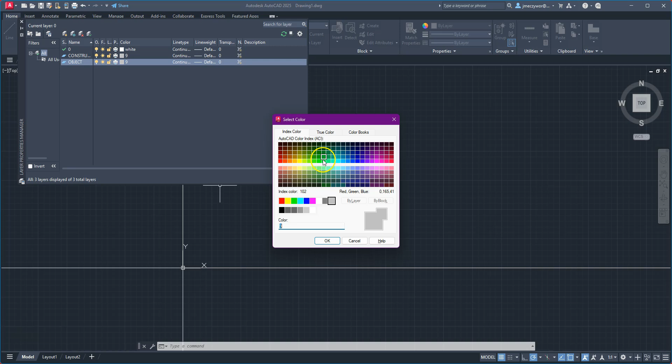Then we're going to right click and hit new layer again, and we're going to call this an object layer. That's where we're going to create our solid lines. We'll double click on our colors again, and my school has green as one of their colors, so you can pick whatever color you like. It doesn't really matter, you can pick red or purple or whatever, but I'm going to pick a nice green here and hit OK. That sets my two layers. That's all the layers we're going to need for this exercise, but normally you might make a hidden layer or a phantom layer, etc.

For my students, my co-teacher and I have actually created templates that have default layers identified for specific things, whether it's plumbing or HVAC, or whether it's a mechanical drawing where we have things like an object line, a phantom line, or cutting plane line, etc. So I'm going to X out of this now by hitting this little X up here.

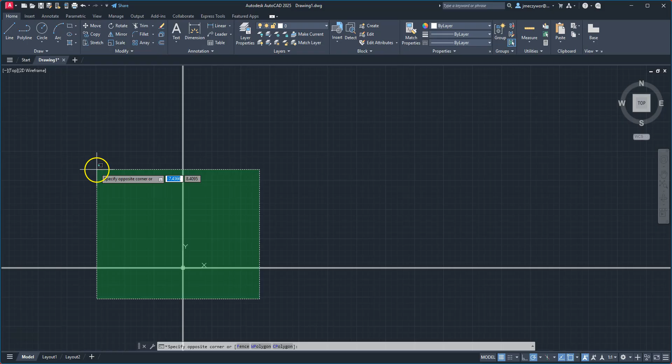Right now, these are on my 0 layer. So what we can do is click below and to the right here, go up and to the left to make a little green box to overlap everything, and click so they highlight. Up here, I'm going to click this down arrow and go to construction. You can see my lines actually switch to a construction layer. If I hovered over that, they would go green, but we're going to go construction because that's what they are, construction lines. Now I can hit escape, and these are on the right layer. Before I forget, I've got to make sure to switch to that construction layer for any lines I'm creating.

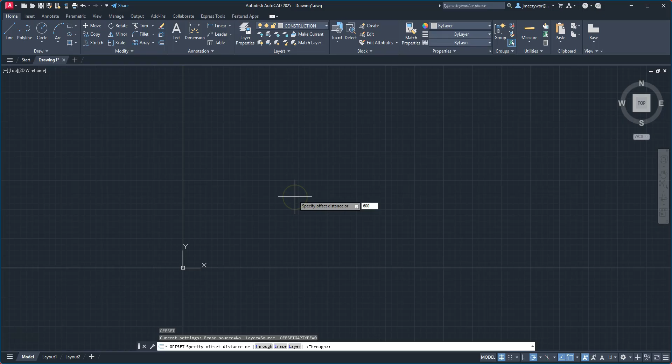Now we're going to offset by typing O and hitting enter. The width of my logo is 600 millimeters, so I'm going to type 600 and hit enter. I'm going to click this line, the vertical one, move to the right, and click. It's okay that I can't see that line right now.

Now, I could hit escape and type offset again, but what I recommend is hitting spacebar. That'll exit you from the command. Hit spacebar again and it brings you back in. Now we're going to go to 420 for the height of the logo and hit enter. I'm going to pick this horizontal line, move up, and click.

Now if we zoom out until hopefully we can see everything -- I'll hit escape first -- but if we zoom out now, we should be able to find that box. This is the overall shape of our logo.

Now my logo has a number of different dimensions, and what I'm going to have you do is create a whole bunch of lines. It's not really going to look like anything yet, but I know where we're going, so just stay with me and eventually we'll end up where we need to be. The next thing we're going to do is this shape, which is an M -- kind of a block letter style. So we're going to create some of these different lines we'll need along the way.

First I need a line in the center because that's where the center of the M goes. So O, enter, 300, enter. We're going to go from here to the center and click. Then from there, I need to create some points for where the M actually comes down at an angle. So we're going to go back into that by hitting spacebar, spacebar.

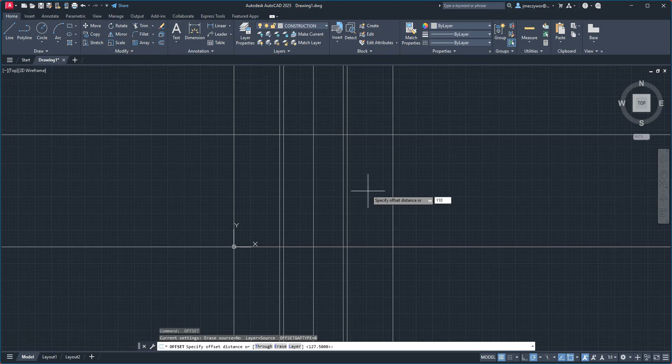Now I'm going to hit spacebar again, and we're going to make sort of the outside edges of my M. The number we're going to need now is 110. So 110, hit enter, pick the top line, go down 110, pick the bottom line, go up 110.

Now I'll give you a little sneak peek of what we're making so you can maybe start to piece this together. But this is the shape that we're making here.

Going back over here, I'm going to hit spacebar again, and we're going to go 45. This time we're going to go from here, in, and from here, in. But I also need to go in from those other edges as well. We had our 255, which would be a little bit further out. I'm going to take that and go to the left.

Now it's going to get real confusing. I'm going to take this line here, go to the right, and put that in there. All right, I have almost my whole shape here.

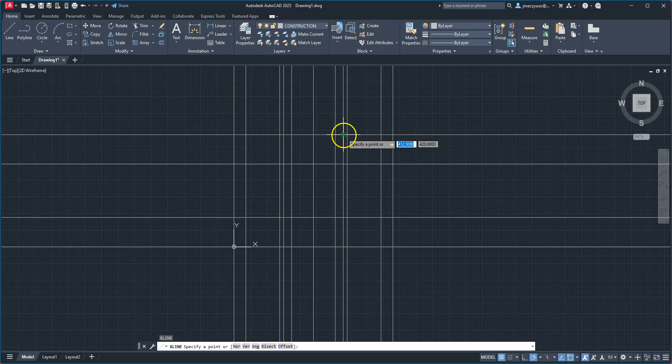Now the last thing we need to do is hit escape, type in XL again for X line. I gotta be careful here to make sure I don't send you to the wrong spot. We're gonna pick on this point right here, and what we're going to do is put an angled line in. Now to put the line at an angle, I got to do a little bit of math here in my head, to be honest. But our number is going to be an angle of...

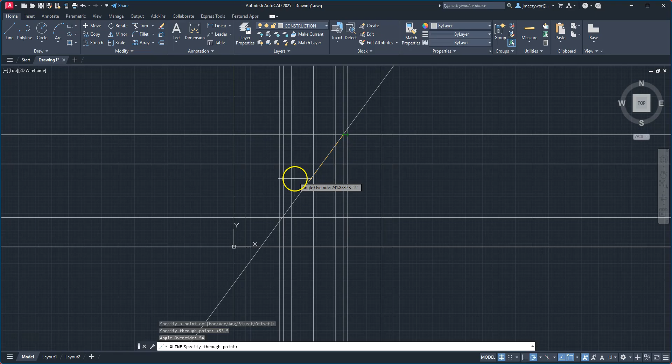53.5. All right, so the way I type that in is I'm going to hold shift, hit the comma key, which is going to put this little Pac-Man guy in - that's what I like to call him. I know it's the less than sign, but it's more fun to call it Pac-Man. And we're going to type 53.5, and we're going to see if I was right, Lizzie. That's going to lock it in at this angle right here. Then all it wants is for me to pick a point somewhere at that angle to lock it in. So I'm going to click, and it's in there.

And then I'm going to hit the space bar again, and I'm going to find that point on the opposite side right here. And then I'm going to click like this. And I'm going to come right down to where that thing meets, and click again. And I don't have to do any math. All right, and I'm going to hit escape.

Now, here's the fun part. Now it is just connect the dots, or connect the intersections, I guess, technically. So we're going to go up to layer properties, hit this little down arrow, go to object. Hopefully that, you know, whatever color you picked is different than gray.

So we'll now type L for line, hit enter. And you're going to have to follow along with me - I promise we'll get there. If we make a mistake, it's all good. In a lot of my videos, if you've watched them before, if I make a mistake, a lot of times I don't re-record the video because it's a good opportunity to sort of show you how to get out of it. Hopefully we don't have that scenario here.

Ooh, actually, before I even say that, I realize I made another mistake. All right, so let's hit escape for a second. Okay, we need to offset these angled lines to make our M properly. So we're going to go O, enter, we're going to use that 110 number again and hit enter. We're going to offset this one down this way, and offset this one down this way. And you'll see why in a moment.

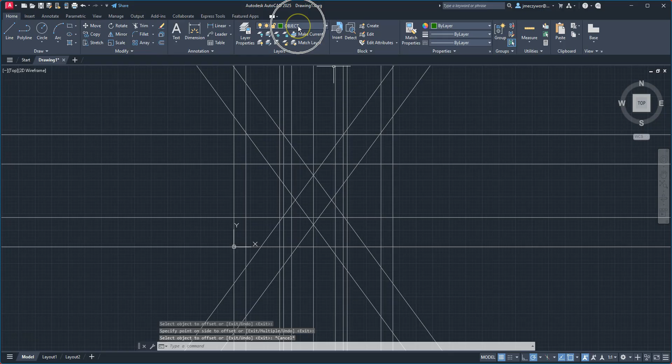Now we'll hit escape. Now we'll make sure that we're on object. And now we'll type L and hit enter. Here we go. Let's see if we can make a nice M. So we're going to click here, go up, click, over, click, up, click, over here. You can follow along with me.

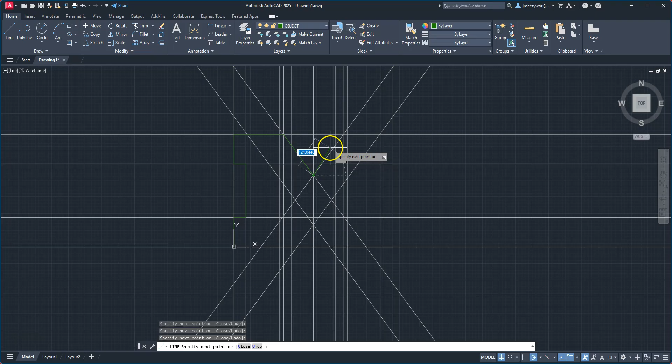Sorry, I won't narrate the whole thing. All right, we're going to go here, and over to where that line was created. Click, down, up, over. We're getting there, folks. This is looking good so far.

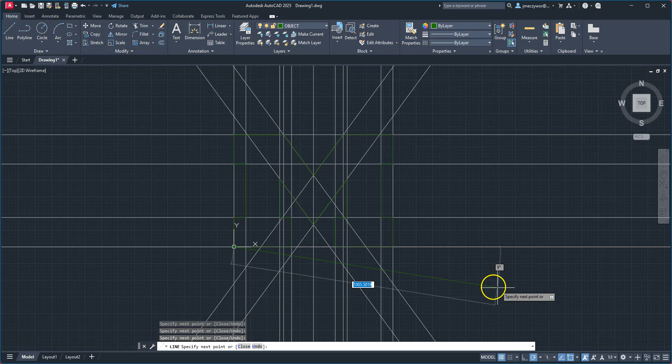Line over, I'm gonna confuse myself here. Click. Over, down, over again, and then we're gonna hit escape. And somewhere in there, there's an M. All right, but what we do now is we're gonna hit the down arrow. Let's see, moment of truth.

We're gonna go to our construction layer, we're gonna turn the layer off. If we did this right, we're gonna have an M underneath. Let's see what happens. Look at that - we've got an M. Okay, so now that we have this, we don't need that construction layer anymore. And I'm going to show you one more trick.

Okay, because with this shape, what we've done with our logos, we made a little border and then we put other things on there as well. But I'm going to show you the way I would do it. And this will be a good opportunity to not only show you the offset command again, but also show you how to trim things and extend them in order to create things.

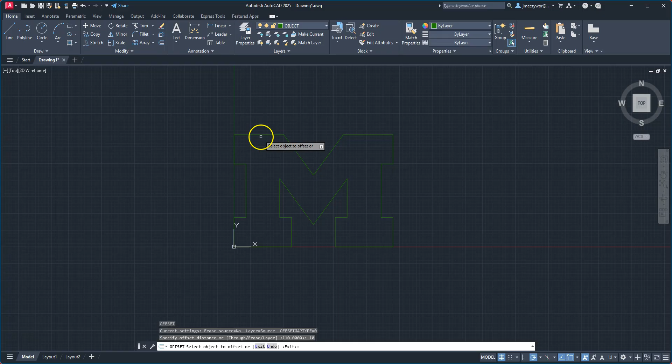So we're going to go O, enter. Our number is going to be 10. We're going to make a little border, make this thing sort of a 3D thing. All right, hit enter. Now I want you to take this line, offset it down, offset this in, so on. We're basically just going to create edges for the inside of our M.

You can see all I'm doing is offsetting every one of these lines in. Some of them will overlap, some will be short. It's all good, that's the point of this exercise.

Now while we're doing this, let me explain this construction layer thing that we were doing along with our object layers. You could see that it was a little confusing before. I obviously knew what we were doing because it's my project, but if you were creating a drawing on your own, you need to find what works for you.

I know some people I've worked with, when they're making views and edges and things like that, they'll only make a certain area for the construction, then delete those construction lines, then make the other more detailed stuff after, feature by feature. But the more you use this, the more you can see through stuff that initially looks like this to what you're actually trying to create.

Once you've offset all these lines like I have, go ahead and hit escape, and then type TR for trim. Now what we're going to do in some of these types of corners is pretty obvious. We're just going to pick these edges and get rid of them.

Click, click, okay. You can also, if you click away from an object, click and drag, and it'll make this sort of squiggly line where you could trim things at once. Like over here, I can do the same sort of thing.

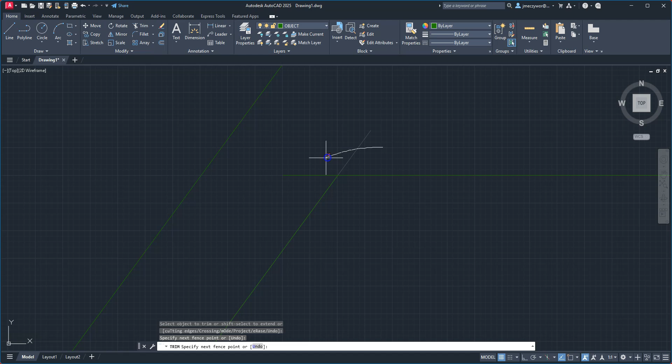Get rid of it. So first thing we'll do is trim. We'll kind of get rid of the loose ends, so to speak. Let's go around, do all our trimming. It won't be the last we have to do of it, but we'll get most of it done.

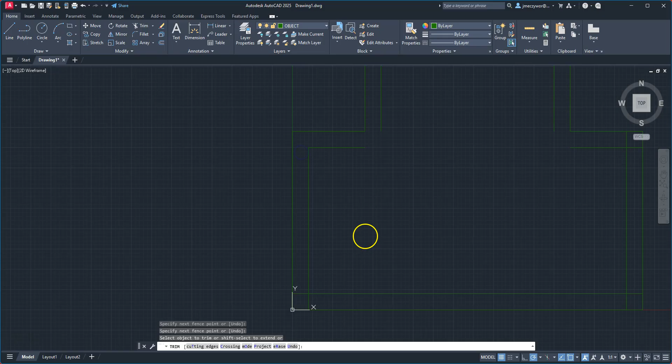I can middle click and hold it down. I can pan like this if I want, just clicking down the middle mouse button, holding it, and dragging it around, like this.

It's a little bit tedious, but we're getting somewhere, don't worry. Or I can just click. And I got almost everything.

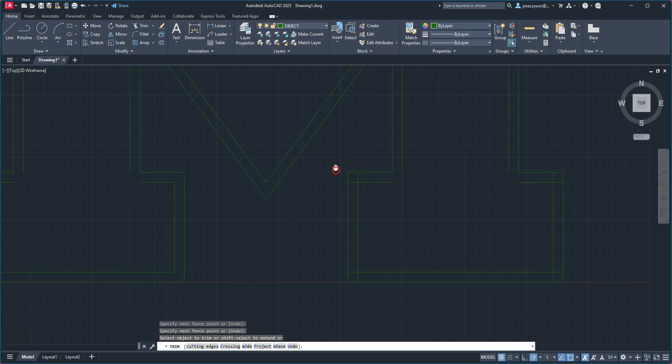We're almost there. Once I have my locations for where my lines are going to go, that's where this is going to get a little bit easier. Now I've got all my edges, but you can see I have some spaces here, and I'd like those to connect. I'll show you how we're going to do that.

So we'll start with this middle one. If I hover over this line, it says it's going to get rid of it. But if I hold the shift key, it'll show it extending to the next part, and it kind of does this depending on what it's closest to.

Right up here it says, oh, I'm already touching, I can't do anything here. But if I get to this half of the line, I can extend it down and then do the same on this line while I'm holding shift, extend it over, and then come back and trim what I don't need.

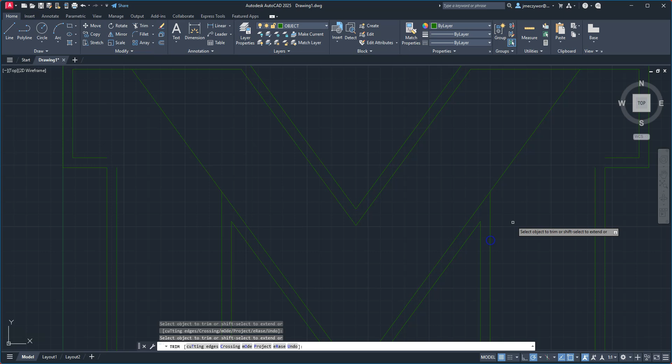So I might want to do the same here and here and here and here, and all I'm doing is holding shift before I click anything. Then I let go of shift and say trim that away, trim that away. I can do the same here, here, trim. We're just going to do this all over, okay?

So for this one, I'm going to be careful. I don't want to make it overlap the other line. So I'm going to actually make this go down, make this go down, then trim these over. Trim, trim.

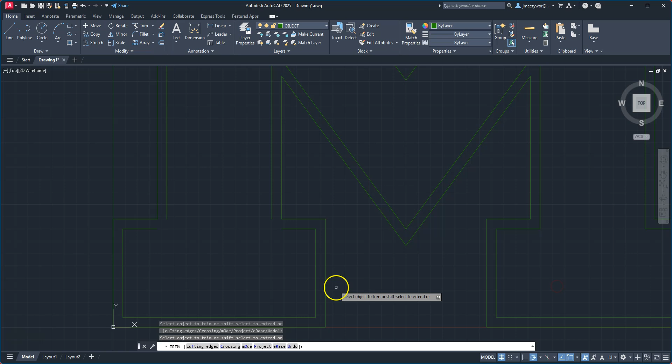Do the same here, hold shift, click, click, click, click. Let go of shift, trim away what you don't need. And then I'm going to come up here, do the same thing, get rid of that.

It looks like I got everywhere, so I can hit escape and then just type Z, enter, A, enter, and that'll kind of put your shape on the screen for you. And there's our M logo for the school that I teach at.